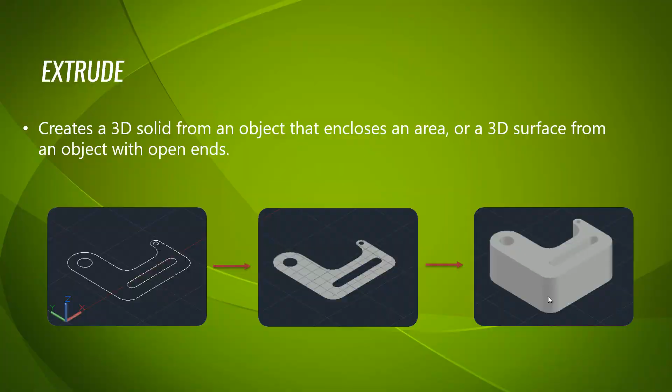Now consider I have my 2D drawing like this. It comprises of lines, arcs and circles. As we know, the initial step before doing extrude is that we have to make it as a closed surface or a region. So here we will type the command region to make this as a closed region. I will type REG and press enter. I will select the entire object like this and press enter.

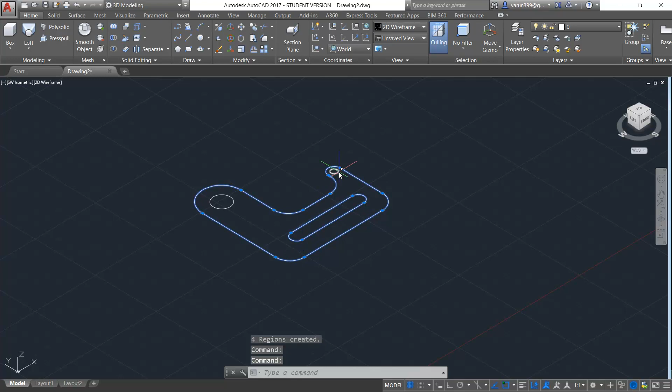Now you can see that it is showing 4 regions created. That means this is a region, this is the second region, this is the third region, and this is the fourth region. You can come over to your visual style and change the 2D wireframe to shaded to check it. But as we know, we needed a hole here, and a hole here. So we must use the command subtract to get the output correctly.

Let me come back from shaded to 2D wireframe. I will use my subtract command, that is SU, and press enter. I will select my first object, the initial object from where I want to subtract, this one, and press enter. Now I will select the objects which I want to subtract, this one and this one. After selecting, I will press enter.

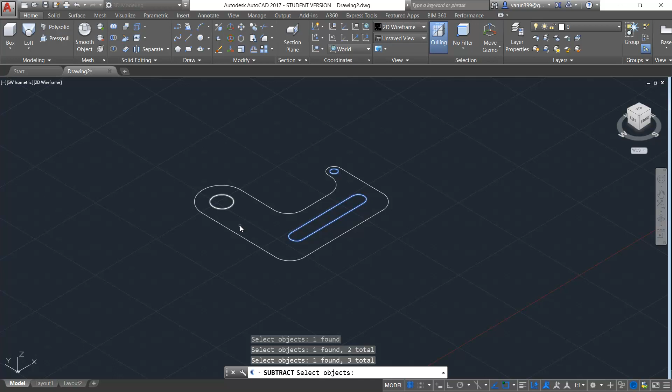Now when you select the object, you can see that it is selecting together. That means it has already been subtracted. You can come over to the visual style, change from 2D wireframe to shaded to check the output. Now, as we have done with the region, we can directly make it as a solid. Here we use the command extrude.

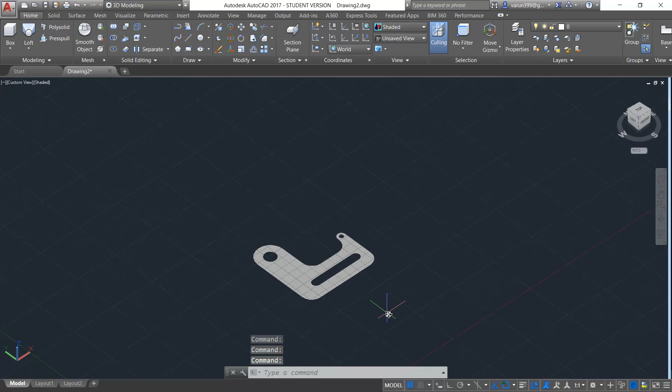In order to use extrude, I will type EXT and press enter. This will activate the extrude command. In the extrude command, we have the wireframe density, which is controlled by the system parameter isolines. You can change the values of isolines to adjust the wireframe density of extrude. After activating the extrude command, it is asking you to select the object. So I will select my object, this one, and press enter.

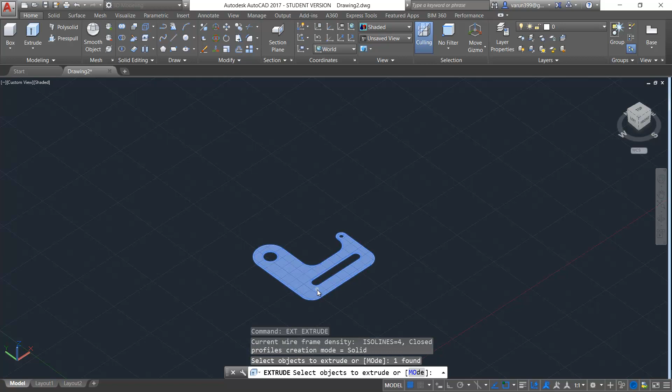Now you can see that it is free to show the height. It can be towards the negative Z direction or the positive Z direction. So I can give a value, say 10, and press enter. That means this object is now of a height 10.

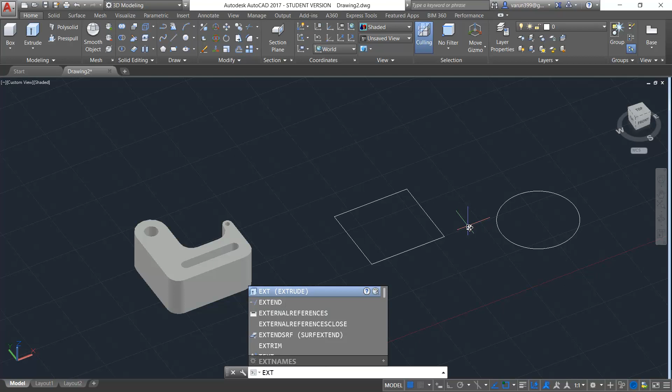Now you must know some interesting facts of extrude: if the object is a rectangle or a circle, you need not do any region or surface to this object. That is because these are predefined objects in AutoCAD. So when you directly do the extrude and select the objects together, you can see it directly becomes a solid.

Let me draw another rectangle and try to do extrude, that is EXT, and press enter. Let me select my object and press enter. Now there is an option called direction, which specifies in which direction you want to extrude your object. You can show a specific start direction and end direction, so it will be showing like this.

Now the next option that we have in extrude is path. Path means if you want to extrude this object along a path, you can show the path. Normally we use the sweep command to get such an option. So we will be learning about this path in the sweep command.

The next option that we have in extrude is taper angle. Taper angle helps you to extrude the object at an angle. This is widely applicable in designing the roof of a building. So let me go for the option taper angle, that is T, and press enter. Now you can see that it is showing an angle. You can give an appropriate angle to get a tapered extrusion of the object.

Let me give an angle 60 and press enter. That means the 60 angle is now set, and now you are ready to give the height. It can be any height according to your need. Let me give the full height so that it becomes sharpened at the top.

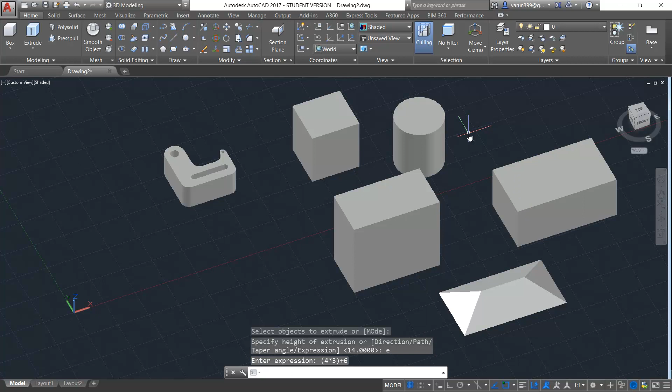Let me draw another rectangle to know the last option in the extrude, which is known as expression. This expression option helps you to input an expression or an equation which depicts the height. I will go with expression, that is E, and press enter. Let me give an equation, 4 into 3 plus 6, which will eventually give you the value 18. So in the expression option, you can give an equation like this to get the height as 18. Like this, you can use extrude in various methods in the software.